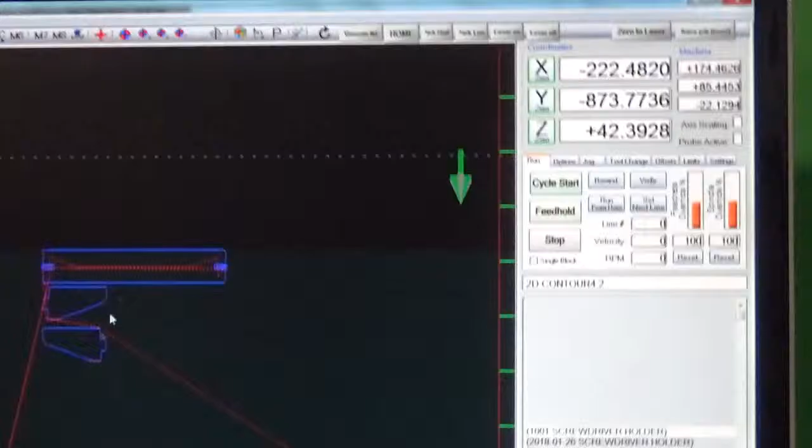Find a place where it's good to put this. So we can turn the laser on. Up here, laser on. And you can see over here now we've got a guide laser over there. You see it?

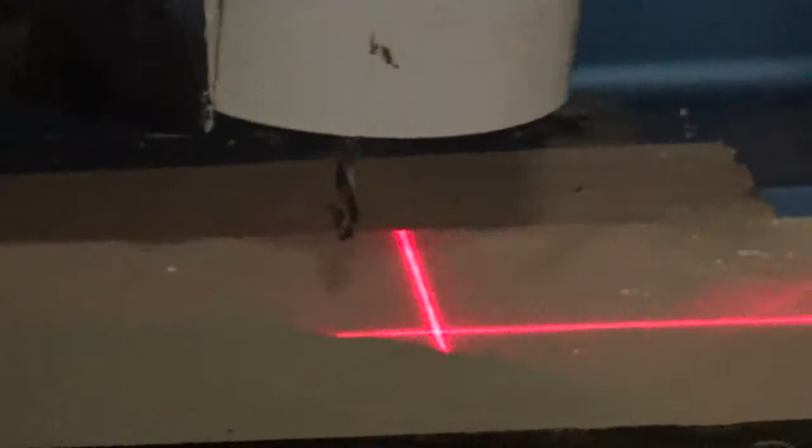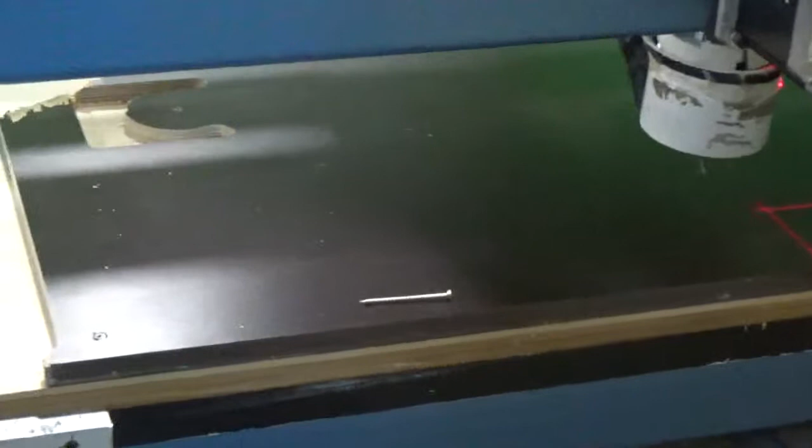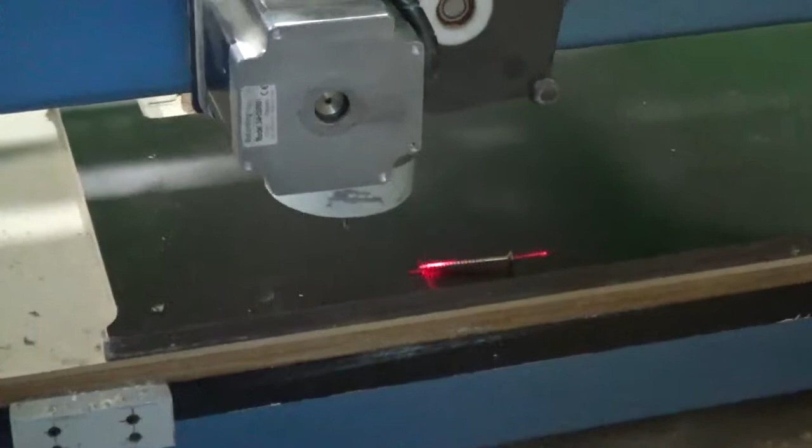So let's drive it over. Can you just line the laser up? Try and line the laser up with the point of that screw. Yep, pretty good. Good enough. Okay, so now

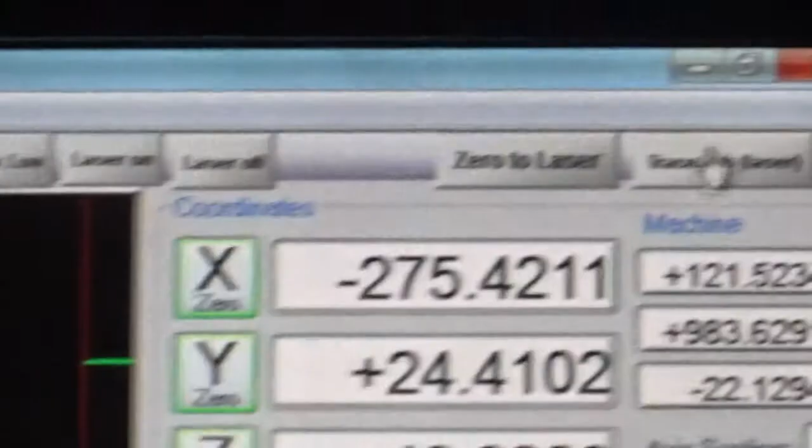zooming out, you can see where the crosshairs are, but you can see our job is still out this way. So what we can do is press Zero to Laser, and what that'll do is it'll move where the job and the laser are relative. You still need to press this refresh button because this software is really bad. The drawing's not up to date, so this will update everything. So now that's where everything's going to appear.

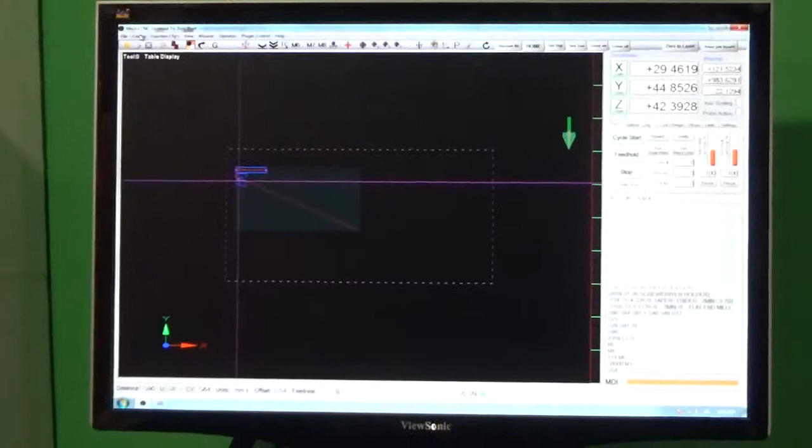So one thing we want to check here is that, so we just want to drive the CNC, and we want to check to make sure that there's timber underneath all the parts that we're going to make. So you see that screw that's in the corner there? That's a little bit too close for comfort.

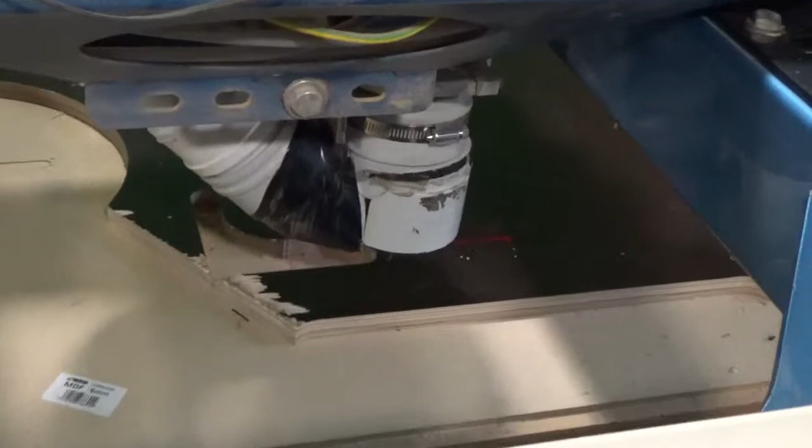But coming out all the way down here, that's about where that part finishes. So are we gonna run out of timber? Only just. Might do it anyway. Alright, so we'll say we're happy with that.